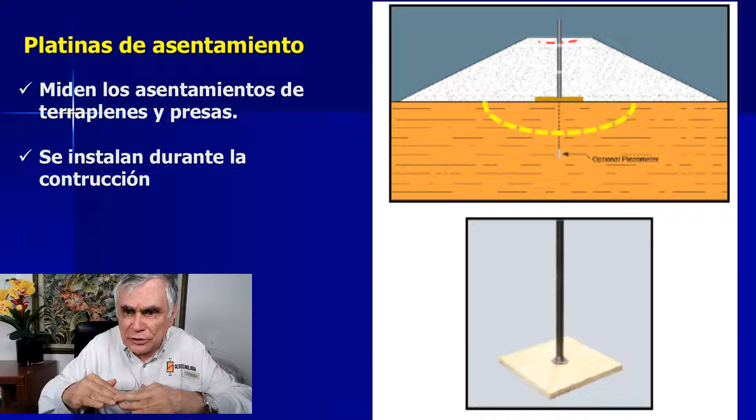Por ejemplo, en terraplenes sobre suelos blandos o en terraplén de gran altura se colocan platinas de asentamiento. Estas platinas, generalmente elementos metálicos o eventualmente plásticos, se colocan a determinada profundidad, se coloca una varilla que se le va colocando extensiones a medida que avanza el terraplén, y miden asentamientos de terraplenes y presas. Estas platinas metálicas se instalan dentro del terraplén durante la construcción del mismo, como vamos a ver en este video.

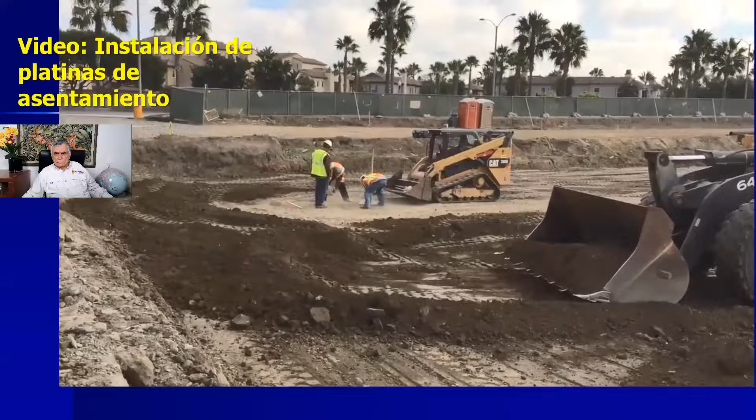Okay, so today we are putting settlement plates in, and essentially that's the bottom of it. You can see that guy's putting it in now, setting them at a certain elevation. They are basically little pieces of metal with a rod that sticks out, and they have a little casing that goes around them to protect them. Then essentially what's going to happen is we'll shoot the elevation of that settlement plate where it's at, and then we'll monitor if the ground's actually settling.

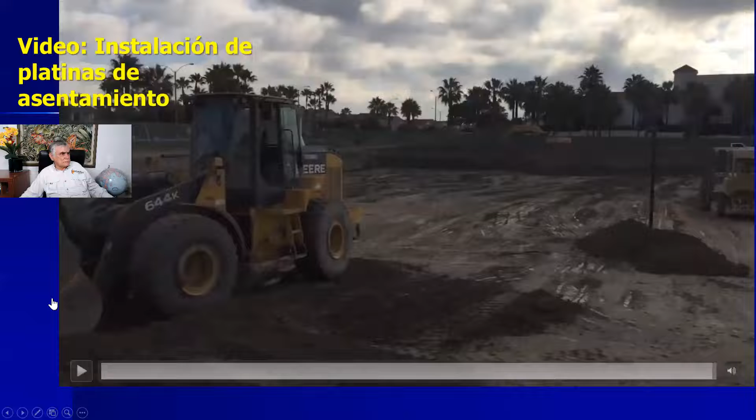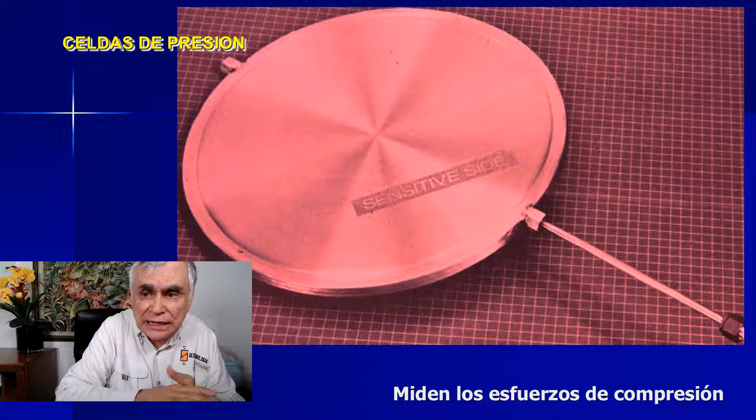Igualmente se pueden instalar celdas de presión, que son unas platinas, pero que miden los esfuerzos de compresión en el terraplén, en la presa. Se instala durante la construcción del terraplén, estas celdas de presión que le van a permitir a usted tener información de la presión geostática sobre determinado punto en el terraplén o en la presa.

Se podían colocar debajo de pavimentos para instrumentar los pavimentos y detectar la magnitud de las cargas que pasan sobre el pavimento. Celdas de presión enterradas en el suelo para medir las presiones en determinado momento.

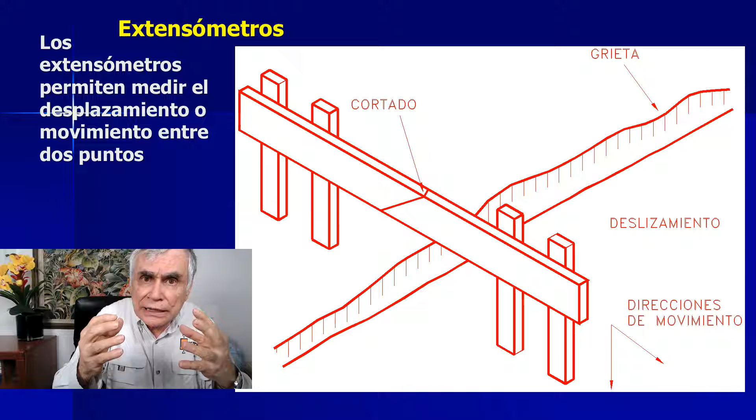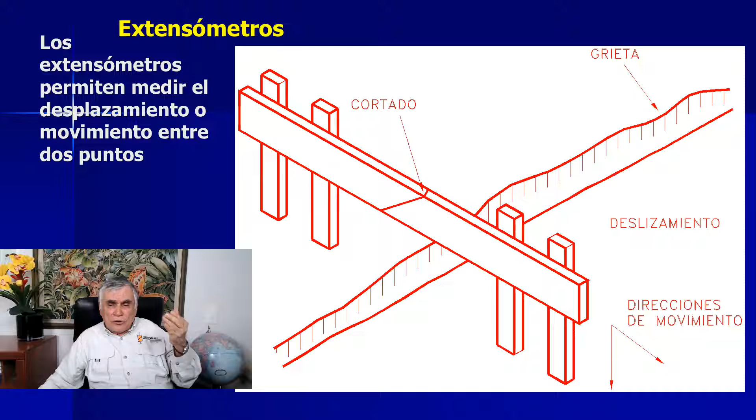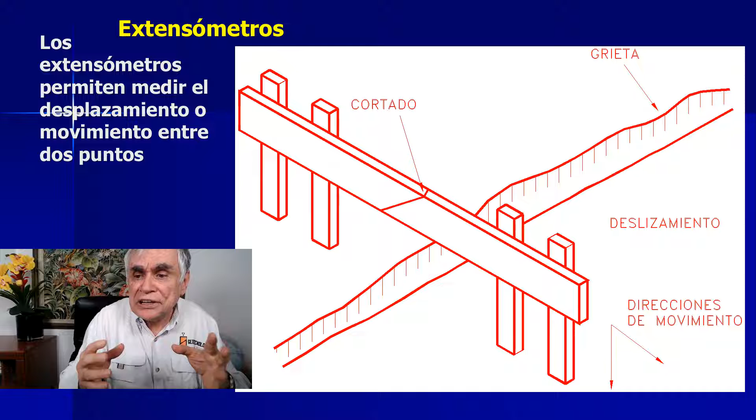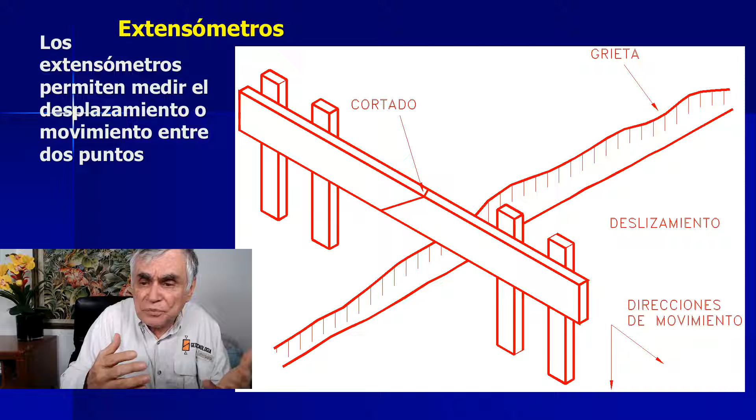Ahora, hay otros más sencillos, ya no electrónicos, ya no tan de precisión de milímetros: extensómetros, como el que ven ustedes en la figura, extensómetros de madera, en que usted viene permanentemente y mide cómo va ampliándose la grieta y para dónde se está desplazando, de manera sencilla y económica.

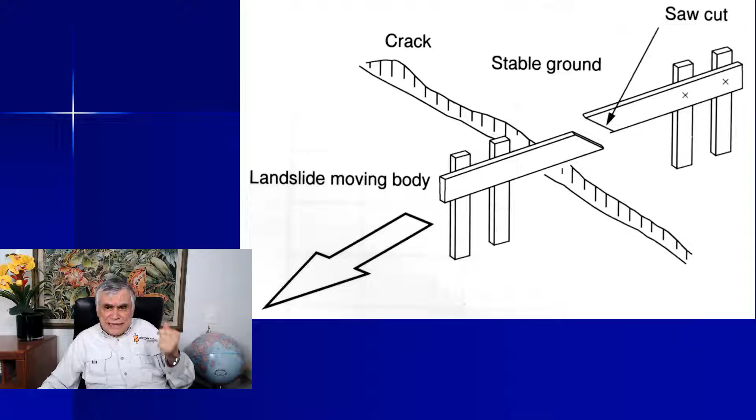Medidores de desplazamiento de grietas. Hay medidores electrónicos, hay medidores manuales, hay muchísimos tipos de medición de desplazamientos de grietas.

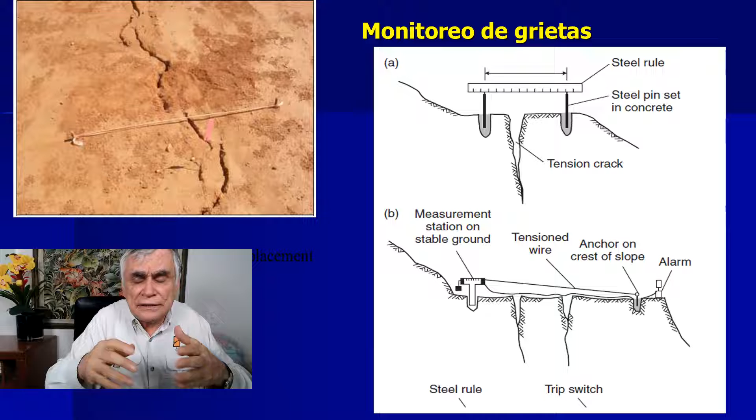Cables. Hay un sistema de cables en el cual hay un cable con un sistema de polea, en el cual a medida que se va desplazando la grieta va desplazándose el cable, y el movimiento del cable nos da a nosotros el desplazamiento de la grieta.

Veamos un ejemplo, acá en Santander. La Catedral del Socorro, o sea, la Basílica del municipio del Socorro en Santander, se está asentando y la torre se está inclinando. Ya se ha inclinado aproximadamente 30 centímetros en la parte más alta de la torre en los últimos 10 años.

Se tienen unos instrumentos, unos deformímetros de cinturón, unos medidores de la grieta en ciertos puntos de la iglesia, y se está monitoreando en forma permanente el desplazamiento de las torres de la iglesia en el municipio del Socorro. Hay un equipo topográfico que mide permanentemente los desplazamientos en los deformímetros, que llamamos deformímetros de cinturón, que son medidores de agrietamiento, medidores de ancho de grieta.

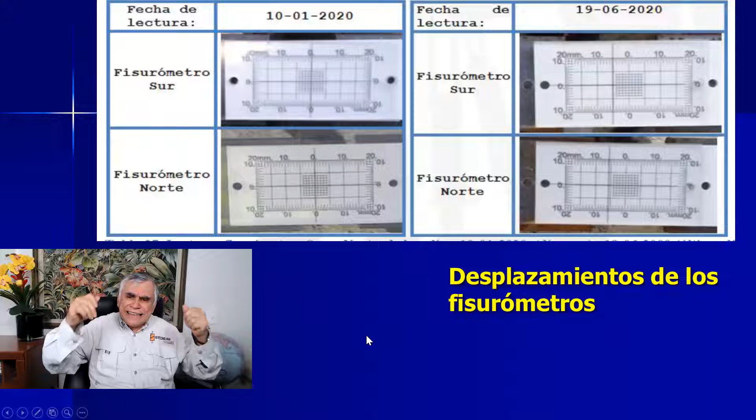Aquí se ve el desplazamiento en el fisurómetro en el sur de la iglesia, que se desplazó más de 1 centímetro, y un fisurómetro en el norte de la iglesia que se desplazó prácticamente lo mismo. Se mide el desplazamiento de las grietas en forma continua, en este caso mediante estos deformímetros de cinturón que están instalados en la iglesia.

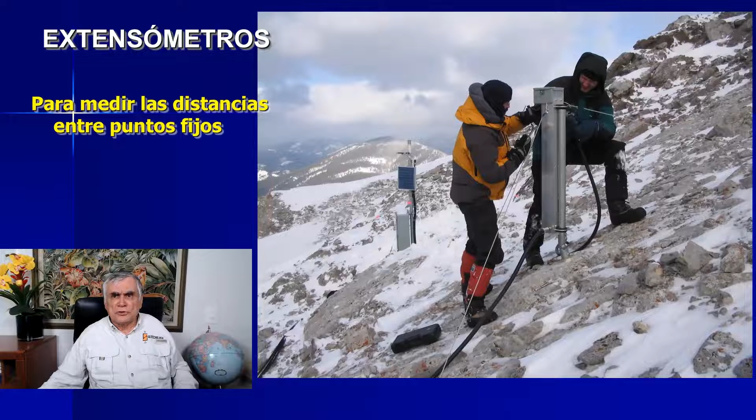Ahora, hay extensómetros mucho más complejos para mayores distancias, midiendo las distancias entre dos puntos fijos. Se instalan dos puntos fijos y se mide permanentemente la distancia entre esos dos puntos fijos por medio de un cable que puede estar comunicado a un data logger.

Y en esa forma se miden los desplazamientos, no solamente los de la grieta, sino desplazamientos del coluvión o desplazamientos del deslizamiento, los cuales pueden incluso, mediante un sistema de comunicaciones, tenerlos en tiempo real.

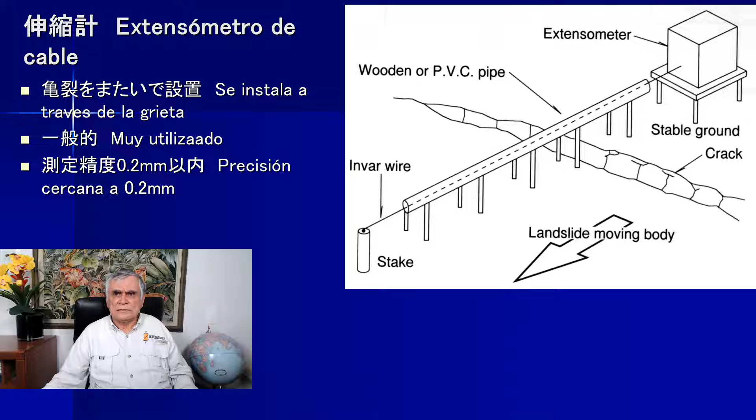Extensómetros de cable. Hablamos de fisurómetros, hablamos de elementos sencillos de madera. Extensómetros de cable con data logger. Y miren que aquí está el sistema que toma los datos y hay un panel solar.

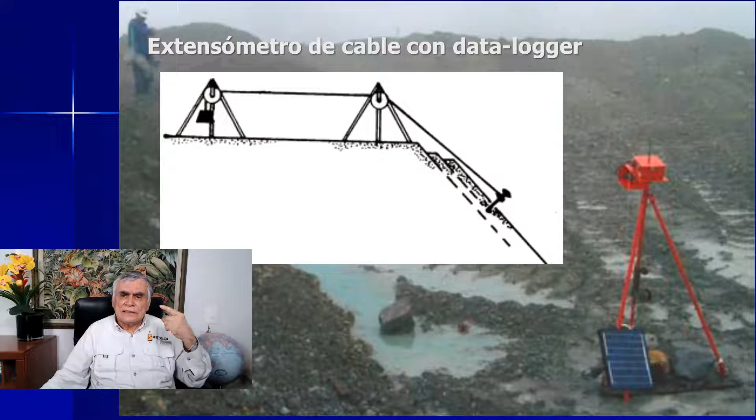Generalmente esos instrumentos para que trabajen en tiempo real utilizan paneles de energía solar.

Se puede hacer un sondeo para reemplazar el inclinómetro. O sea, en vez de inclinómetro, hacemos el sondeo y colocamos un elemento de peso en la parte inferior, un cable, y a medida que se va desplazando la superficie de falla, el cable se va hundiendo y se mide en superficie mediante un sistema automático o manual. Se van midiendo las deformaciones de ese cable que está metido en el sondeo.

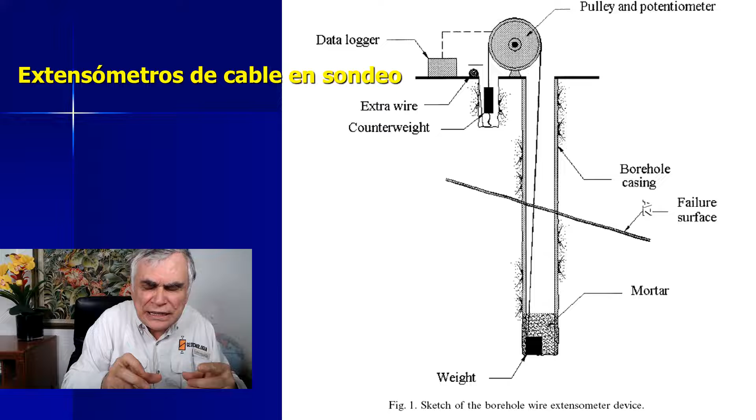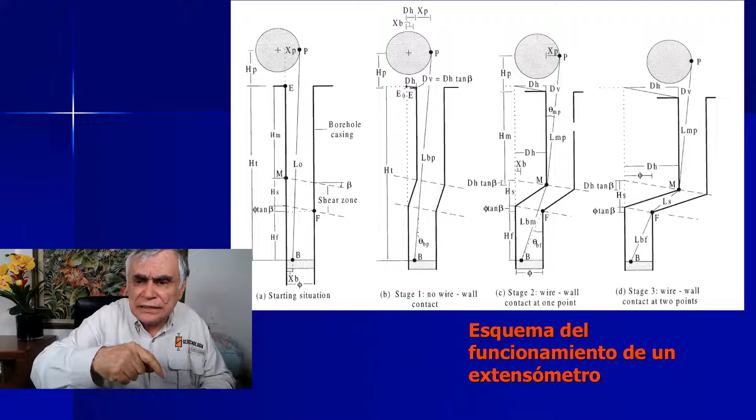Extensómetros de cable en el sondeo, que funcionan similar a un inclinómetro. No dan la precisión de un inclinómetro, pero siendo mucho más económicos, podemos hacer varios puntos. Por ejemplo, en un deslizamiento, tener 5 puntos, 5 sondeos, y en los sondeos colocamos cables, y en los cables le colocamos unas marcas para saber cómo el cable se está hundiendo dentro del sondeo, y en esa forma tener el desplazamiento de la superficie de falla.

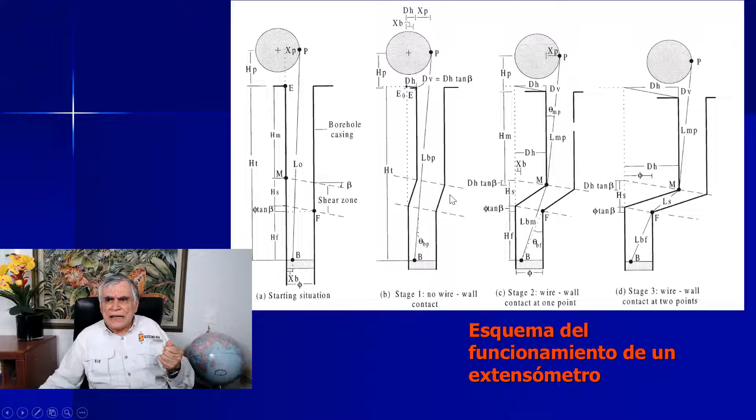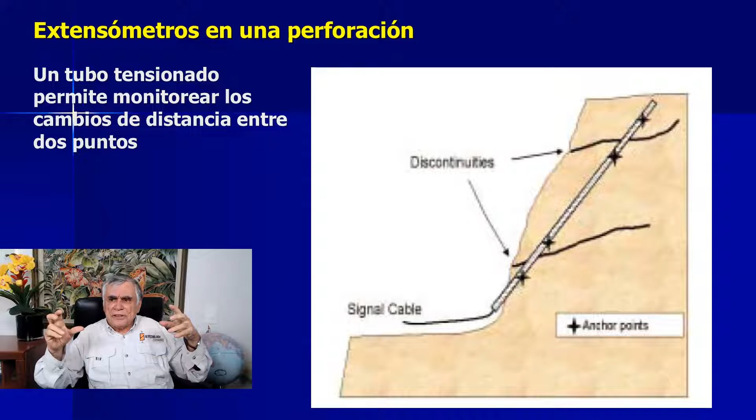Un extensómetro de cable que mide las deformaciones de una superficie de falla a profundidad en un sondeo. Extensómetro en sondeo, incluso podemos tener varios puntos dentro de la misma perforación, para monitorear la distancia entre esos puntos.

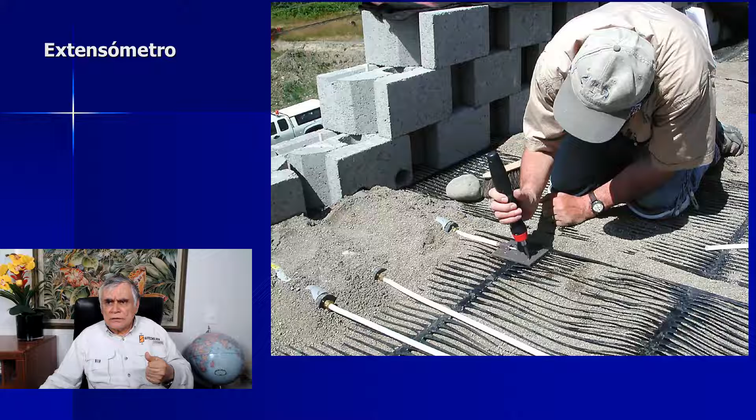Extensómetros para medir las deformaciones de la pared del muro, colocados internamente dentro del terraplén. Extensómetro electrónico.

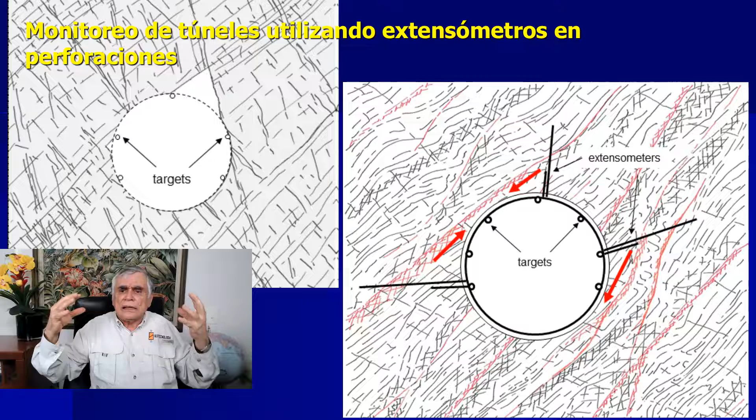Monitoreo de túneles, monitoreo de perforaciones, monitoreo de fallas geológicas, utilizando extensómetros de cable, extensómetros en perforación, medidores de ancho de grieta de hilo vibrátil. El hilo vibrátil tiene la ventaja que nos da deformaciones muy pequeñitas, y se instalan en grupos de 3 para tener el movimiento X, Y y Z.

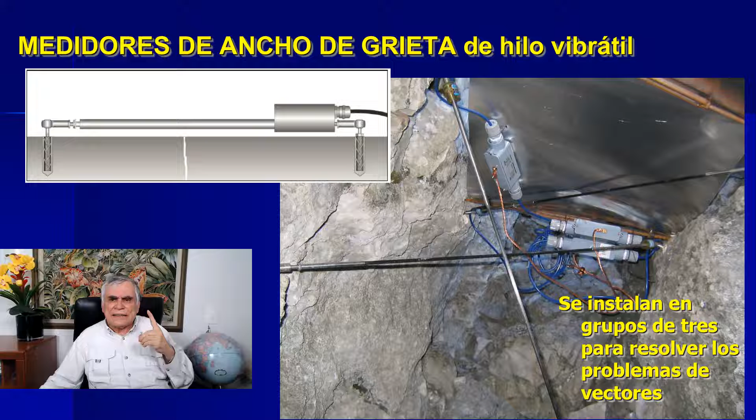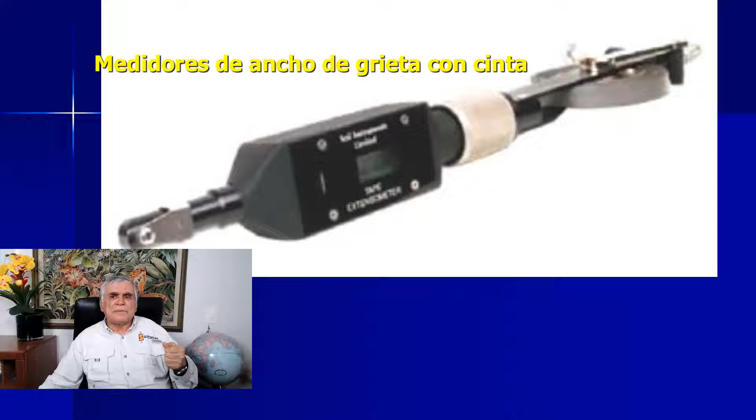Medidores de ancho de grieta de hilo vibrátil electrónicos, de ancho de grieta, medidores electrónicos o medidores con cinta. Con cinta, la extensión se está marcando acá en una pequeña pantalla. La pantalla nos va dando la extensión de la cinta. Se colocan en la grieta, se colocan en la zona del túnel y nos permiten detectar desplazamientos.

Extensómetro de cinta.

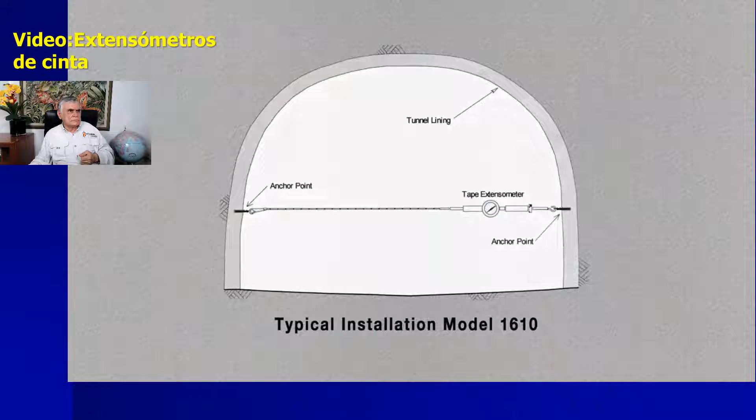Accurate and reliable, the Geokon Model 1610 is the instrument of choice on tunneling jobs throughout the world. The 1610 is designed to measure changes in the distance separating two fixed points, usually in underground openings, in particular tunnel walls and roof-floor convergence.

Other applications include measurements of the deformation of the shotcrete tunnel walls used in the new Austrian tunneling method, closure between walls of open cuts, in structures, buildings, and unstable slopes.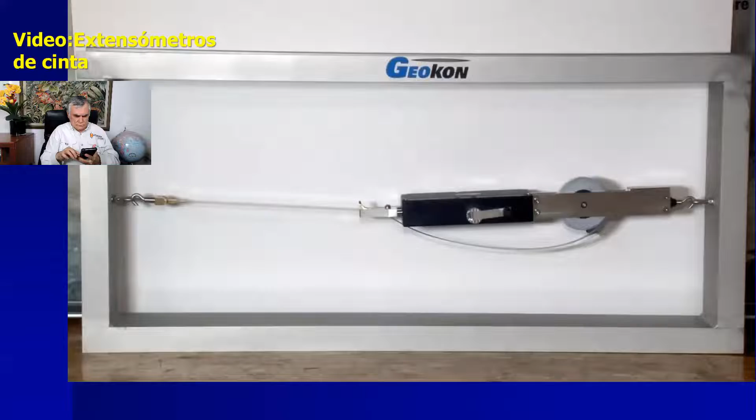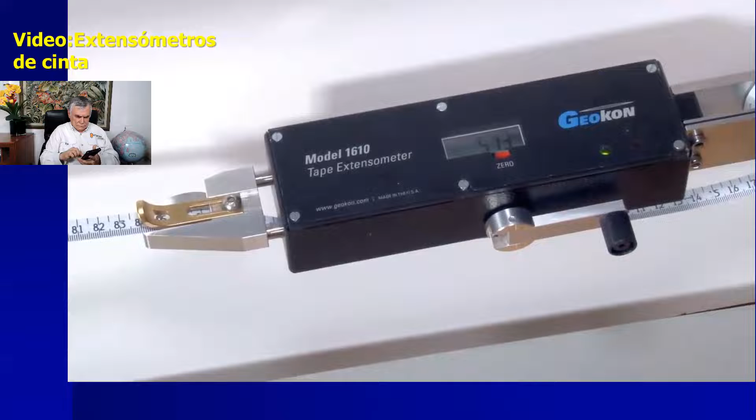The tape extensometer has two purposes: to apply a consistent tension to a measuring tape, which has holes punched at regular intervals, and to provide an accurate reading of the distance from the punched hole being used to the eye bolt being used. The 1610 consists of a stainless steel measuring tape with holes punched at regular intervals.

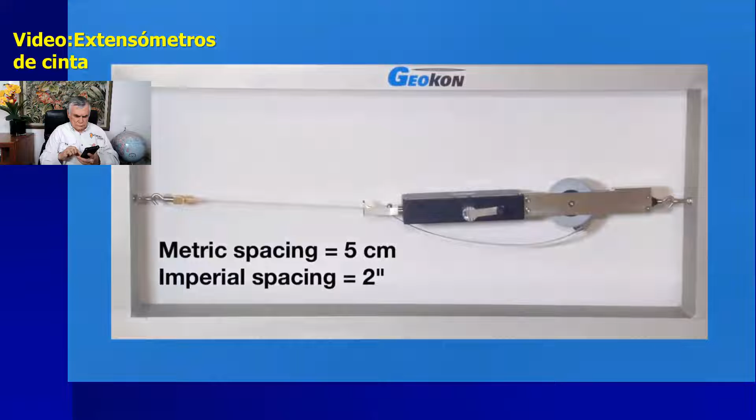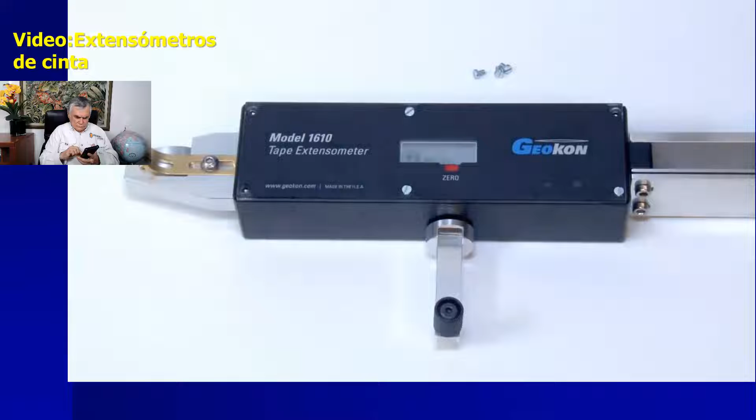This tape is stretched between two points on opposite sides of an underground opening. Hooks on the tape, as well as the back end of the extensometer, are used to connect the instrument to installed eye bolts. On the front end of the unit is a locating pin attached to sliding bars that engages with the closest of the holes punched into the tape.

The unit may be shortened and tension applied to the tape by winding the tape tensioning handle clockwise. An additional reel handle at the rear of the instrument controls the extension and retraction of the measuring tape.

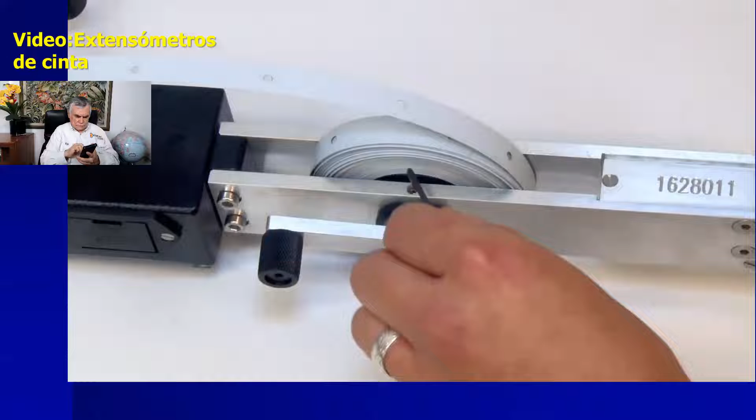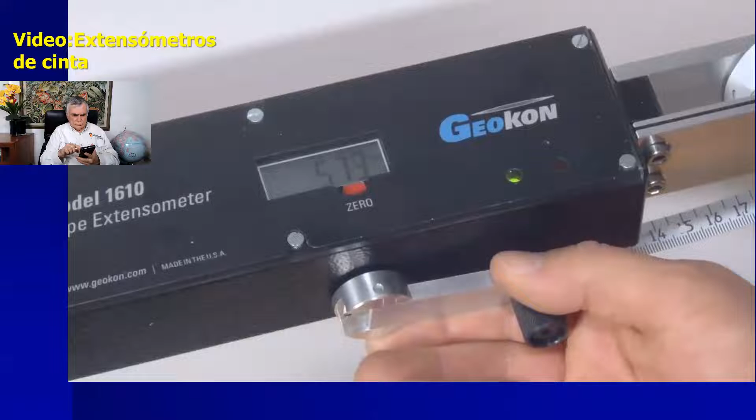The ease with which the tape can be wound onto the spool is controlled by a set screw at the bottom of the unit. Should the reel handle tension become too tight or loose, minor adjustments can be made with a hex wrench. The face of the instrument has the gauge digital readout. The green and red indicator lights allow the operator to correctly tension the measuring tape.

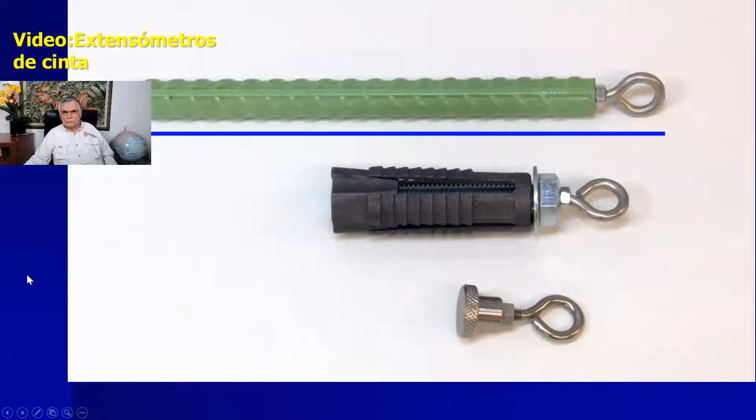It is recommended that one of the following three anchor points be used: a groutable anchor, which is essentially a 3/4 inch piece of rebar with an eye bolt threaded into the end, an expanding wedge anchor, or a weldable anchor that may be spot welded to steel supports.

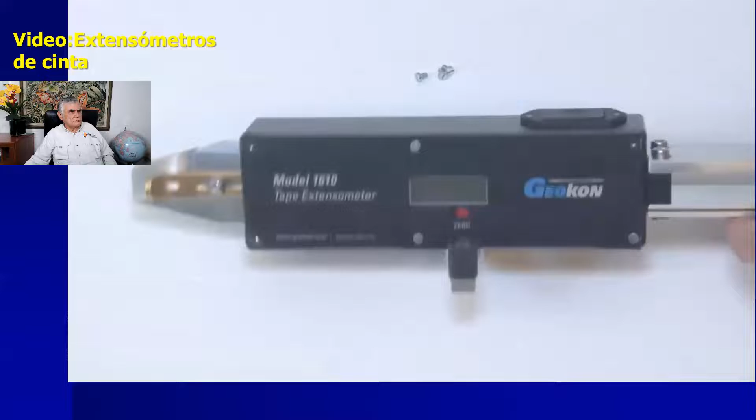The Model 1610 requires two batteries. A 9-volt battery powers the red and green indicator lights. This battery should be replaced at least once a year and removed if the unit is to be stored for any length of time. The digital gauge readout is powered by a Model LR44 coin-type battery.

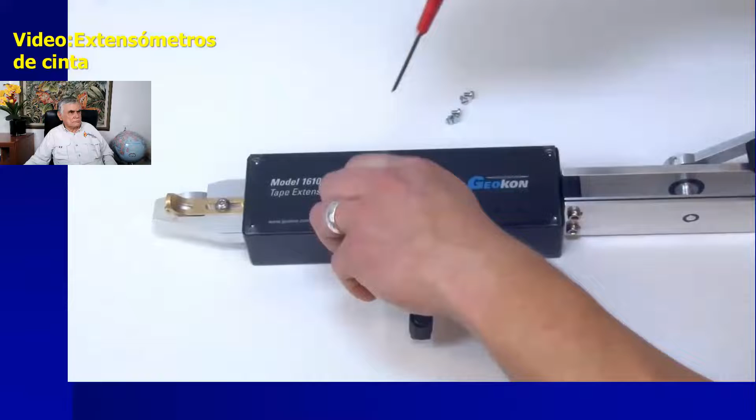This battery automatically shuts the gauge off if not used for 5 minutes. A low battery is indicated by the readout flashing on and off. The faceplate of the 1610 must be removed to replace this battery.

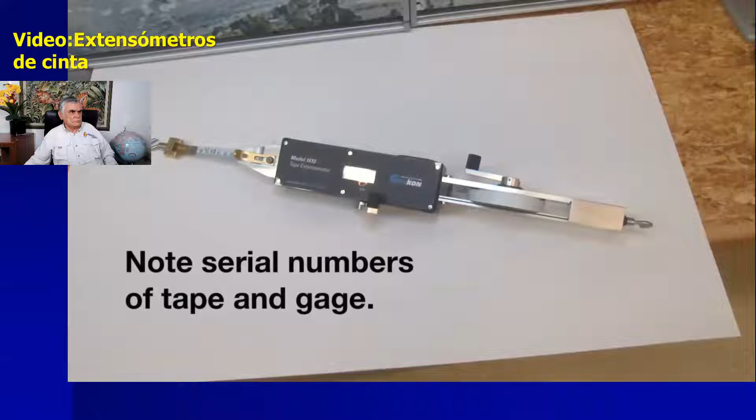Before beginning a set of readings, be sure to note the serial numbers of the gauge and the tape to be used. It is also critical to note the ambient temperature at the location to be measured.

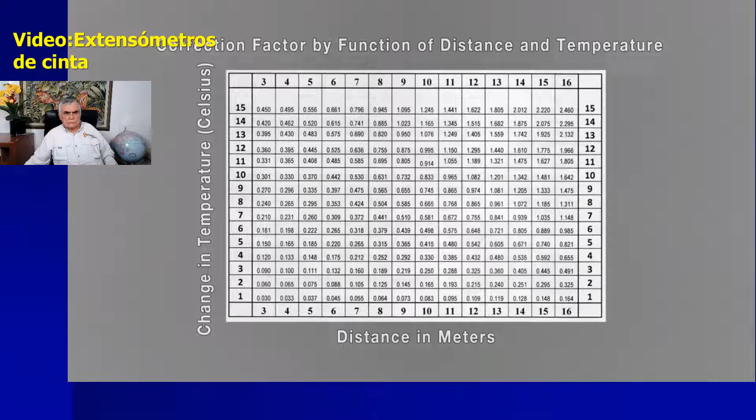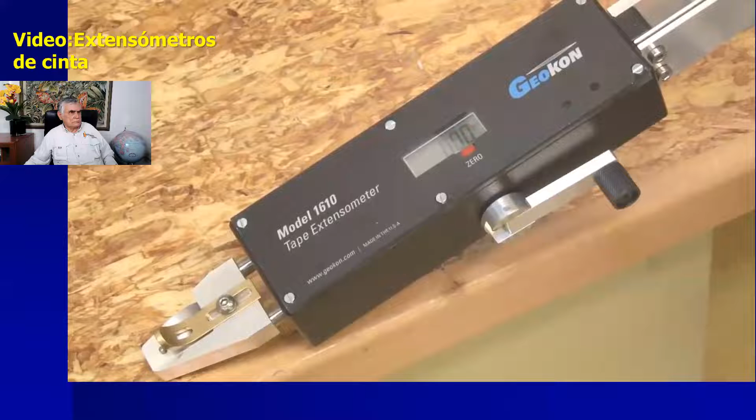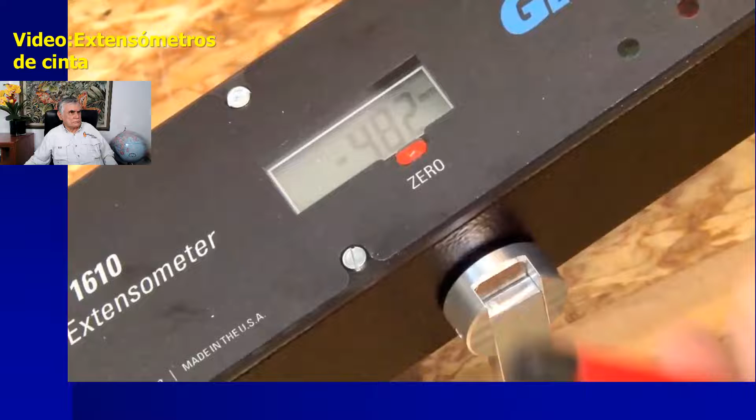Before starting any measurements, make sure the display reads 0 millimeters or inches with the tensioning handle turned fully counterclockwise to its stop. If the gauge does not show 0, press the 0 button located below the gauge readout window. It is important to periodically check the 0 reading, especially at the start of each set of measurements.

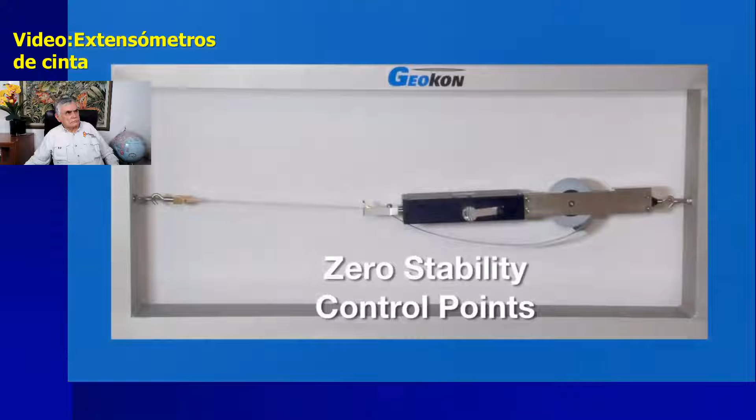Zero stability control points should be established by installing two eye bolts on a stable structure whose dimensions do not change. Preferably, readings taken between these two points would be taken before each measurement survey to ensure the self-length of the tape extensometer does not change over time.

An aluminum framework such as this, kept in a stable temperature environment, can be used as a control. The stable control points are also useful for taking practice readings.

After attaching the tape hook and the instrument into the anchor points, place the nearest punched hole on the measuring tape over the locating pin and secure it by sliding the brass tape holding latch all the way over the tape and pin. Turn the tape tensioning handle clockwise until one or both of the indicator lights come on.

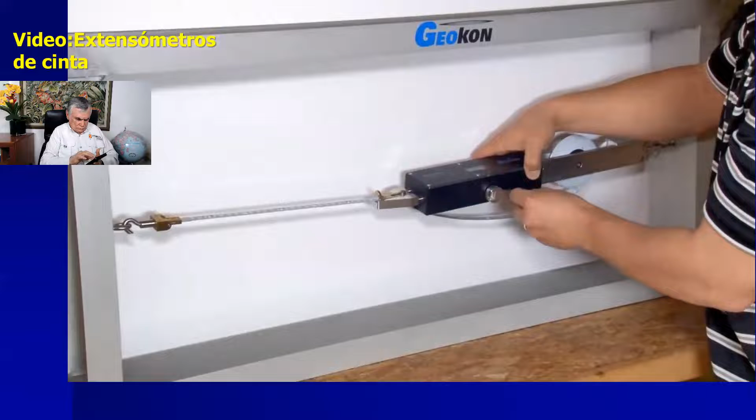Turn the tensioning handle clockwise in small increments until only the green indicator light stays on when the instrument is at rest and untouched. Place a finger under the tape in front of the instrument. Gently lift the tape to ease the tension being applied. The green indicator light should go off. Removing the finger will cause the green indicator to illuminate again.

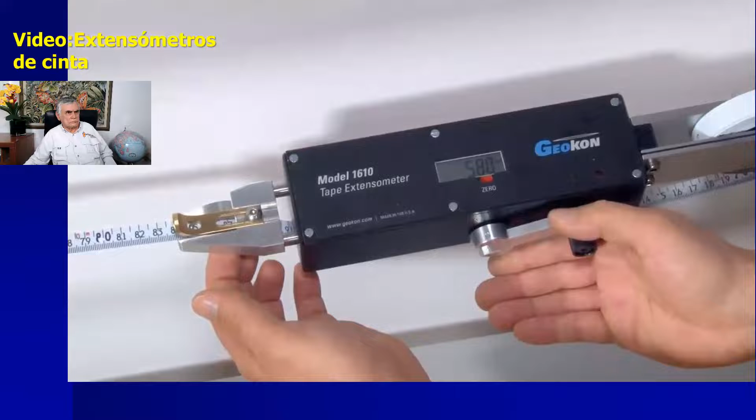If the green indicator light stays off, turn the tensioning handle in the clockwise direction to reapply enough tension for the green indicator light to go on and off with gentle lifting and releasing of the tape with your finger. The tape is now correctly tensioned.

If the red indicator light comes on, the tape is over-tensioned. In this case, turn the tensioning handle anti-clockwise, then gently begin turning the handle clockwise until one or both indicators light. Back the tensioning handle off until both lights go off.

When you are satisfied the tape has been properly tensioned, take a reading on the digital gauge. Twisting the unit to see the gauge has no effect on the readout as long as the tensioning handle is not moved. The total distance between the eye bolts used equals the sum of the distance along the tape as shown by the punched hole used, plus the digital gauge reading.

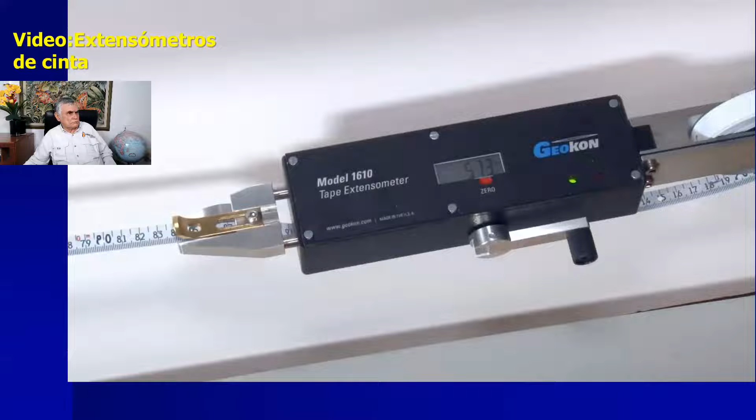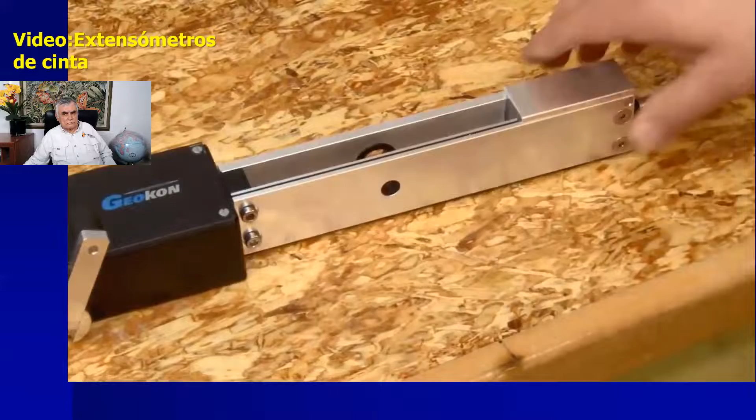Tapes may be changed by holding the tape and turning the tape reel handle anti-clockwise to unscrew the handle. Remove the tape reel spindle and the tape may be removed and replaced. It is important to take new baseline readings when changing out a tape, as there may be minor differences between tapes.

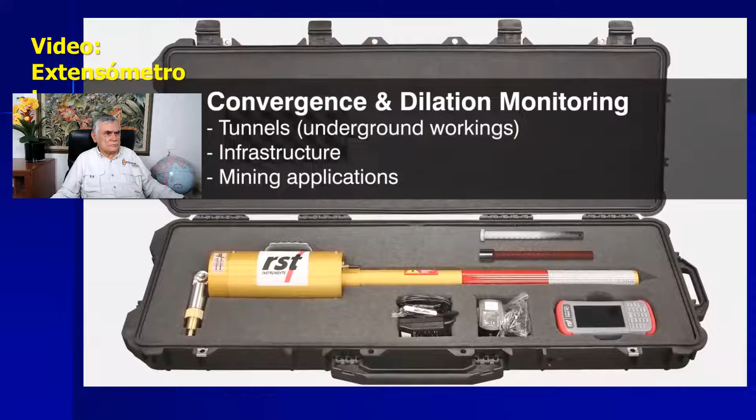It is ideal for areas where repeated precise measurements are required. The pivot laser extensometer is used for convergence and dilation monitoring of tunnels or underground workings and can be used for infrastructure and mining applications.

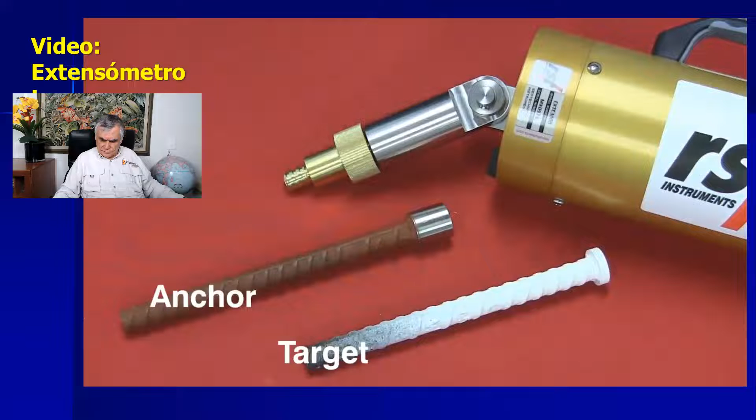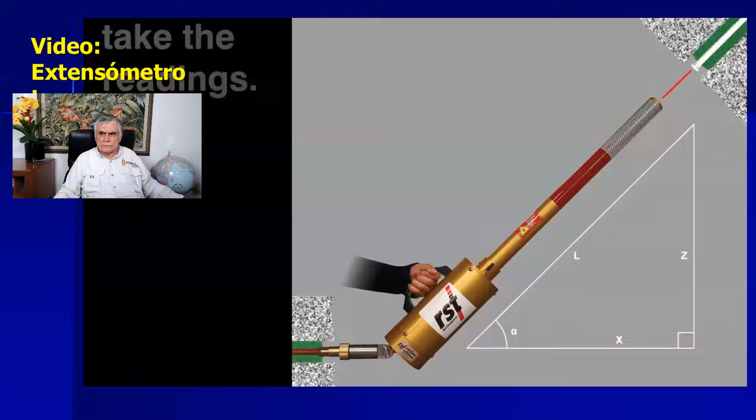The target and the anchor are grouted into the wall. The anchor should be at an easy to access height. When taking readings, the pivot laser extensometer is attached to the anchor. The laser is then pointed to each target in that section and a reading is taken. An internal tilt meter measures the angle for calculation of vertical and horizontal components.

Its range is from 1.5 meters to 50 meters and has an accuracy of 1 millimeter at 30 meter distance. Readings are taken with the ultra rugged Field PC2 with Bluetooth connection to the laser and the supplied software. The laser measures the distance between the target and itself and the angle.

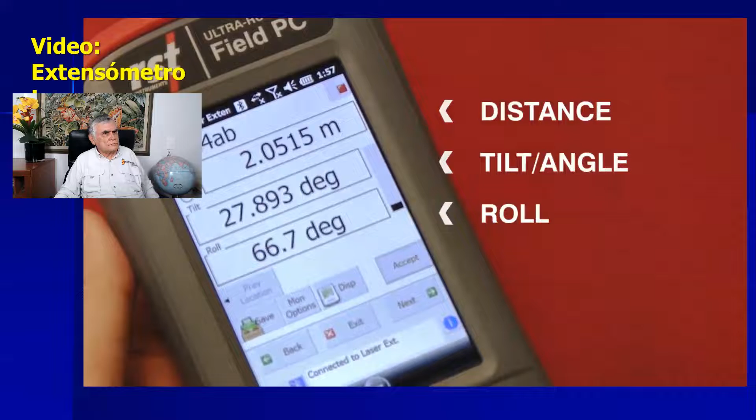The main benefits of the pivot laser extensometer over a tape extensometer are quicker, less cumbersome readings, which greatly reduces labor costs. The targets only have to be accessed at the time of initial installation rather than at every reading, which you would need to do with a tape extensometer.

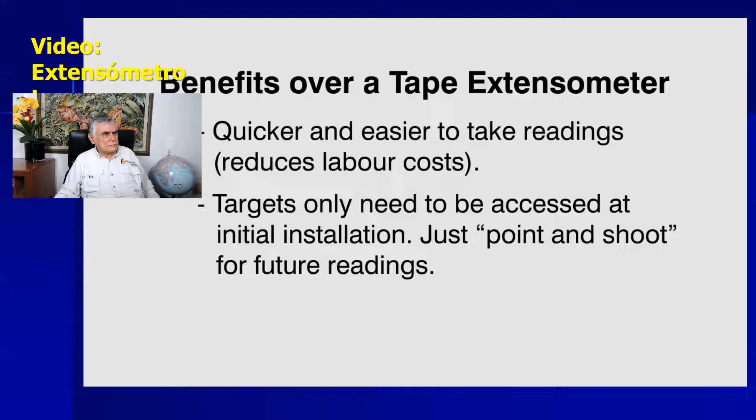It eliminates the need for lifting equipment every time you take a reading. The tunnel does not need to be shut down to take readings. This benefits productivity compared to using a tape extensometer, which typically requires the tunnel to be shut down to take readings.